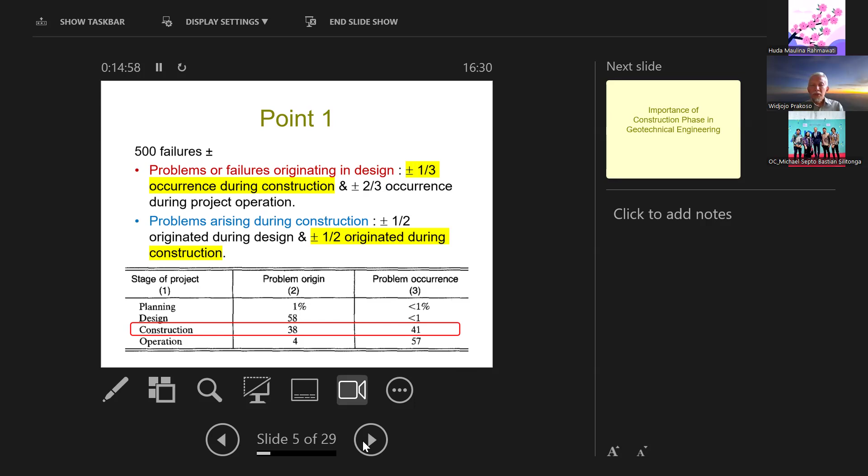Okay, so the following slides are to explain more about this. So the first one is, I'm going to bring up a very early speech of Karl von Terzaghi. I think most of you, or it should be all of you, have heard about Karl Terzaghi. He's called the father of soil mechanics, or the father of geotechnical engineering. He wrote one of the pioneering books in soil mechanics, Soil Mechanics in Engineering Practice.

And his speech was almost 90 years ago, during the International Conference on Soil Mechanics and Foundation Engineering. By the way, that was the first conference. Next year, in 2026, there will be the 21st conference. So 90 years ago, he brought up this issue, and it's still relevant to us even to this day. In his speech, he highlighted some of the very fundamental things about geotechnical engineering.

Okay, there are some points. I have uploaded the paper as well, so you could read the paper from the upload. He highlighted the obvious ones, actually, but this is something that we need to remind ourselves. One of the points he made was soils are made by nature, not by man, and the products of nature are always complex. This is obvious, but sometimes we never think about this.

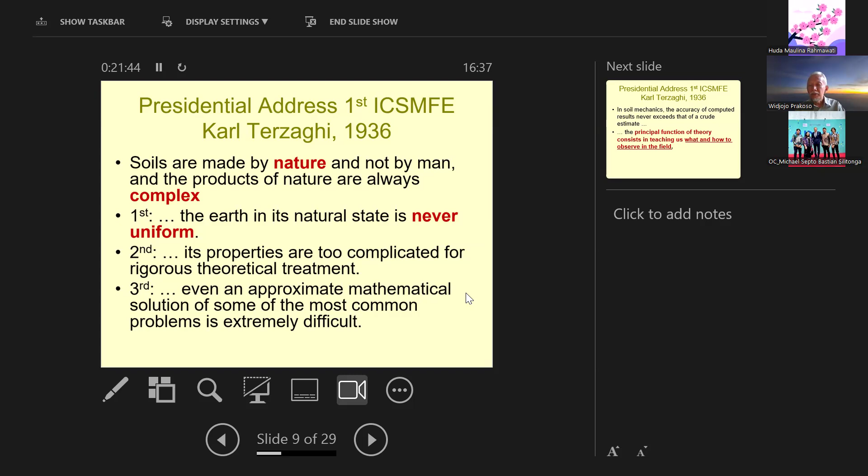These are very classic points by Professor Terzaghi, and this is something that we need to remember. Soils are made by nature, not by man. So soils are complex and never uniform, and whatever numerical methods we have are just approximate, so that we could get some idea of what's going to happen in the field. That's exactly the sentence put in red: the principal function of theory consists in teaching us what and how to observe in the field. So the methods we use are to give ideas, because the actual behavior would be observed in the field.

Okay. So again, what we could observe in the field is during construction. So it is very important to have thorough observations in the field, to make sure that what we expect in our design is observed in the field. If the observation in the field is different from what we expect in the design, we need to change the design, not the other way around.

Okay, because again, the truth is in the field. So if the field behavior is different from what we expect in the design, we need to review, and maybe change the design to match whatever we observe in the field. Okay.

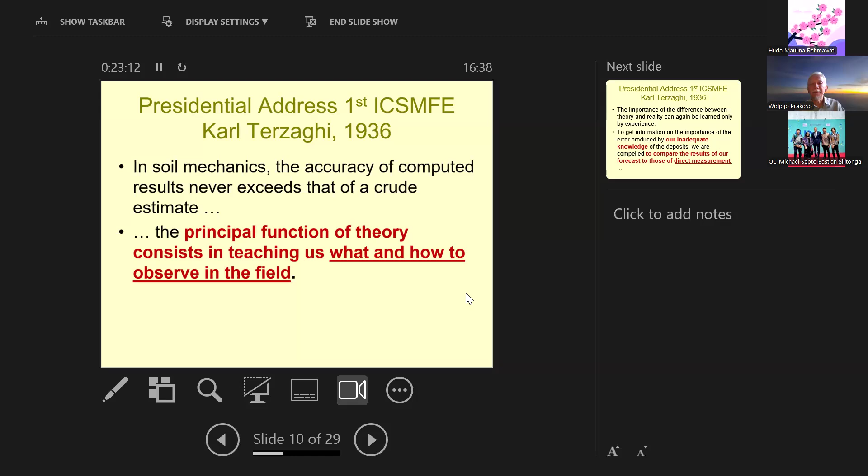And again, there are different sentences just to highlight our inadequate knowledge during the design, and we need to compare the results of our simulations, our numerical analysis, with those of direct measurements from the field. Again, we need to compare the design and the observation in the field. Again, the truth is in the field, not in our numerical model.

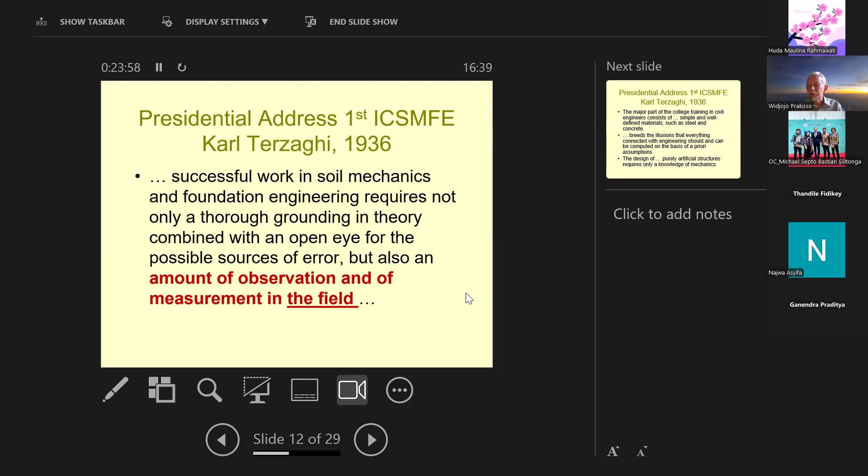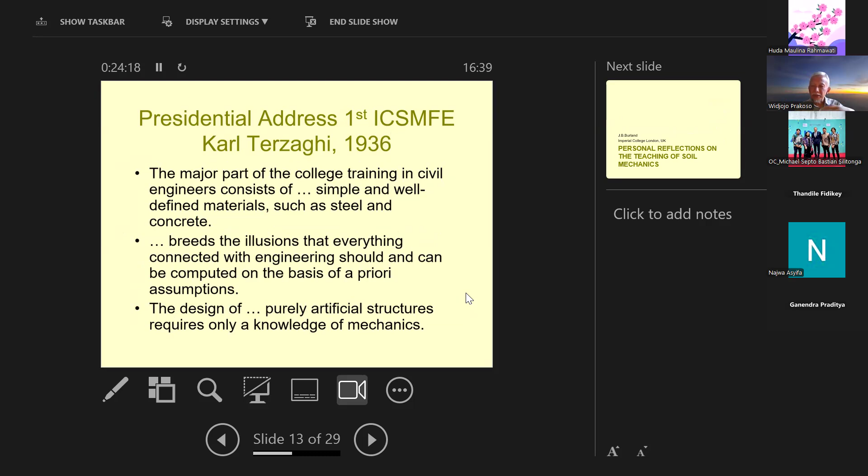And again, just to highlight, what Professor Terzaghi emphasizes is the measurement in the field. Okay. This is just to highlight my statement regarding the steel and the concrete, because those are man-made materials that we could have good quality control. That is not the case when we are dealing with soils.

This is another paper. I already uploaded it in the MAS 2 as well. The paper by Professor John Burland of Imperial College London, a very insightful, very important paper on what he has learned during I think 40, 50 years of practice and teaching in geotechnical engineering. And he developed this so-called geotechnical triangle, and this is to emphasize there are three pillars.

Number one, ground profile. You need to have good soil investigations, and you need to understand the geology. We are in geotechnical engineering. There's a geo part of geotechnical engineering that relates to geology. So you need to understand the geology as well. And after that, we could do lab tests to get the observed behavior of soil, and we need to develop an appropriate model to get some ideas how it's gonna behave in the field.

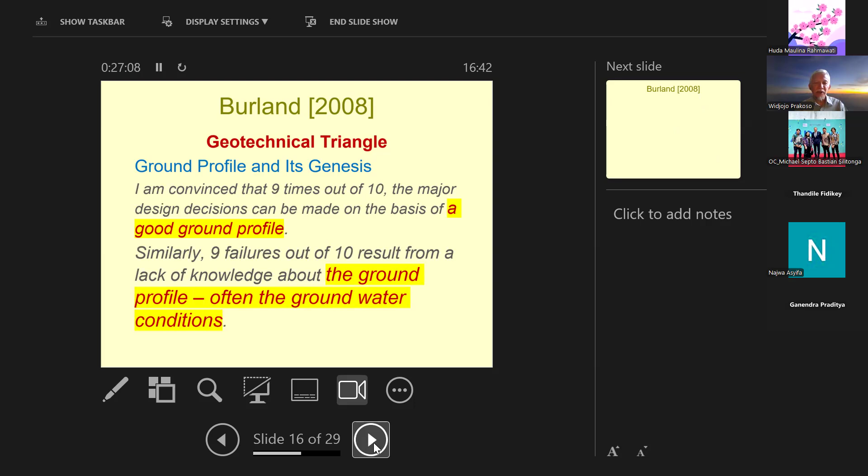Okay, and he mentioned the observed and measured behavior of the soil, the field observations of behavior, including movements and groundwater flow. That is part of one pillar, and rigorous methodologies and advanced instrumentation. We're going to talk about instrumentation as well. So how we can properly observe what we have in the field. Okay? So this is the first part. We need to make sure that we understand the soil behavior, and the soil behavior is really in the field.

Okay, and furthermore, I'm bringing up this paper. It is also in your package in MAS 2. This is another paper by Professor Terzaghi as well, and you could see the title: Consultants, Clients, and Contractors. From the title, you could see contractors, of course, is about the construction phase. So this is really a paper about how the design and the construction should be viewed. Okay. And I have some quotes.

And this is linked to what Professor Osterberg mentioned in his paper, in I think point number 7, communication. Okay. Communication. And this is what has been highlighted actually by Terzaghi. He mentioned, in the realm of earthwork and foundation engineering, the absence of continuous and well-organized contact among the parties is objectionable and even disastrous. So communication is very important, as highlighted by Professor Osterberg as well.

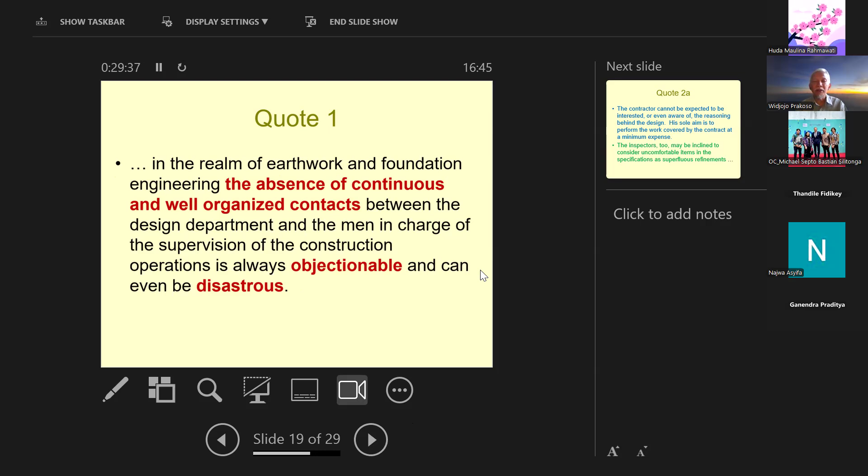And okay, why is it complicated? We need to understand that each party has their own interest. The contractor's objective is most likely how to perform the work as budgeted. Most of the time, the contractors don't really care about the design thinking by the consultants. So can we expect the contractor to have a very rigorous treatment of the theoretical? Unlikely. Okay. How about the inspectors?

Or in our present time, typically called the construction management or the supervisors. Most of them actually just don't have enough knowledge to go into what was highlighted by Professor Osterberg, by Professor Terzaghi. They just do whatever they think is most important, and most likely those things are more on the administrative side of the construction. Not too many inspectors or construction managers really understand the geotechnical conditions.

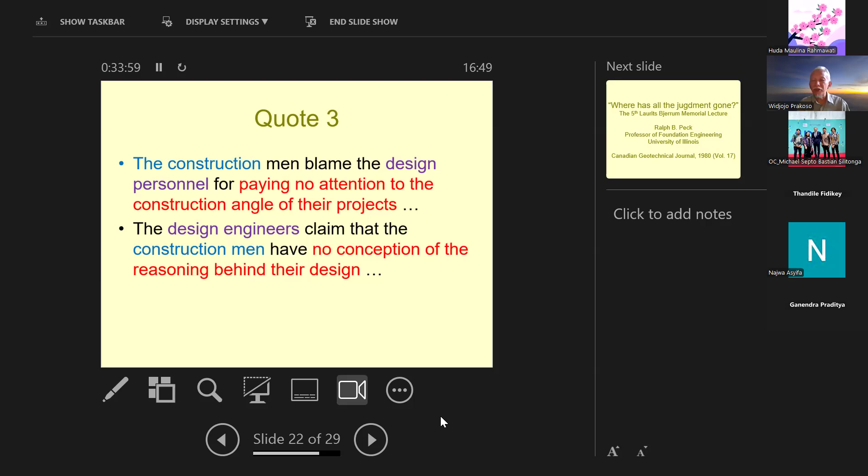And more, there is a paper by Professor Ralph Peck. If you open up the book by Terzaghi, it's typically by Professor Terzaghi and Peck. Professor Peck was Professor Terzaghi's student and his partner for a long time. And he mentioned again the same thing: failures occurred mostly because of lack of communication among parties in design and construction. So this point has been brought up over and over because it still happens to this day.

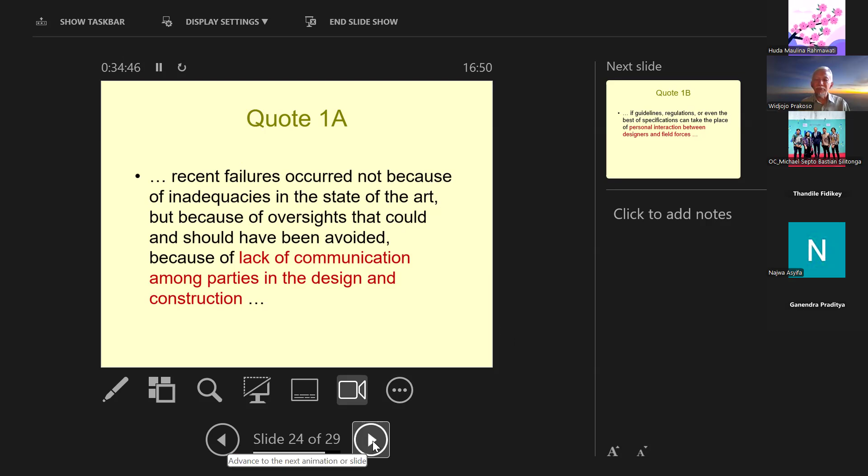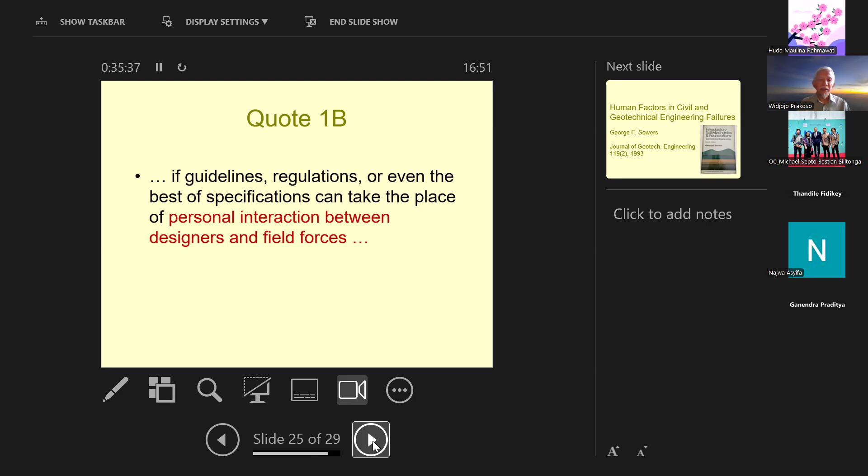Okay, and this is very important. Guidelines, regulations, or even the best specifications cannot take the place of personal interactions between the designers and field forces. So the best documents cannot replace good communications, good interactions. To highlight again, when we do construction, we have to bring the best of our communication skills to the project, so there are no points missed. So I'm going to continue with the paper by Professor Sowers.

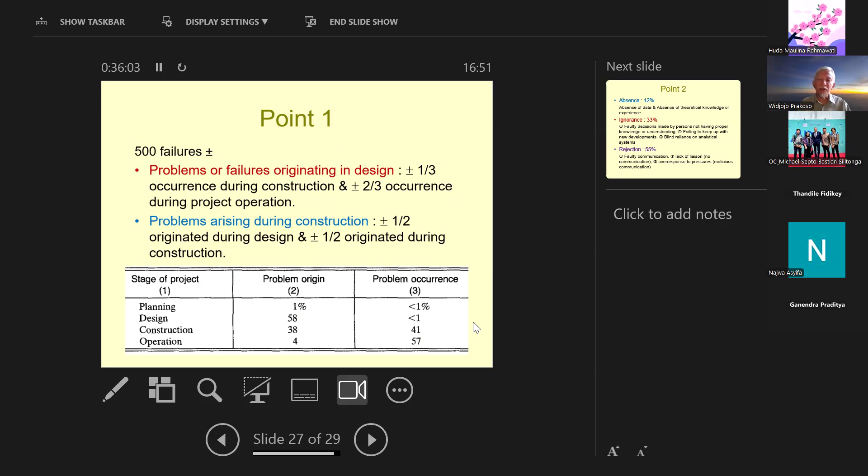The title says Human Factors in Civil and Geotechnical Engineering Failures. This is the slide I showed you previously, to highlight the importance of the construction. Furthermore, he mentioned where or what goes wrong. These statements are quite hard to read, I understand, because when Professor Sowers writes things, it's quite difficult to read. But basically, he proposed there are three major problems that lead to failure.

Number one is absence. Number two is ignorance. Number three, rejection. What is absence? Absence is about the data, the knowledge or experience. And ignorance: faulty decisions made by persons not having proper knowledge or understanding, failing to keep up with new developments, and blind reliance on analytical systems.

As I mentioned to you, whatever software you use, the software is just a tool. The actual behavior is in the field. So if you insist, this is what the numerical simulations tell us, so you think that is the truth? That would lead to so-called ignorance in Professor Sowers' terms. Okay, and the last one is rejection, including communication problems. And if you look at this, the lack of knowledge, the lack of data is just about 12% of the problems leading to failure.

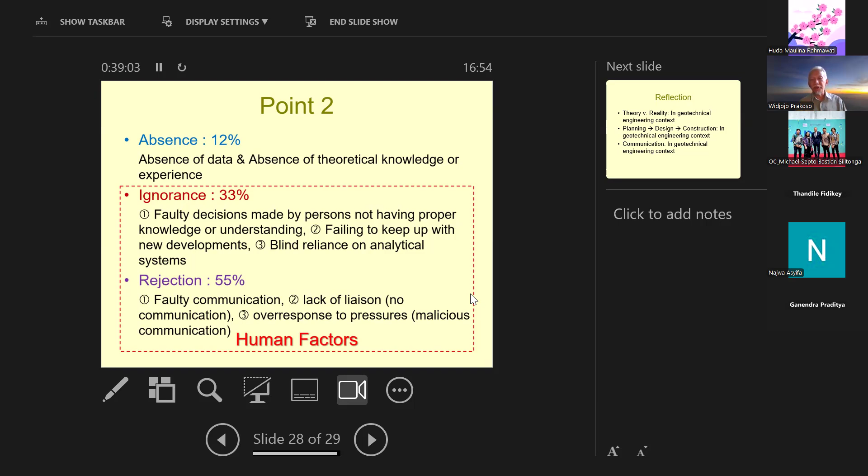Okay, so one thing is that we have to learn about the technical things, about geotechnical engineering, the soil mechanics, the lab, the models, the software. That is important as well. But don't forget about the human factors. That is very important because that would lead to failures in the field.

So just to highlight, when we do reflection, we have to be really careful when we compare the theory and the reality in the geotechnical engineering context. As I mentioned to you, theory is one thing, but the reality is in the field. And again, you have to remember, geotechnical materials, soils, are not man-made materials. We cannot control what is in the field. We have to accept whatever is in the field.

And we have to think through the planning and the design and the construction, to make sure all these phases are interlinked. We cannot just have a planning separated from the design separated from the construction. We cannot have that in geotechnical engineering.

And the last point is about communication. We have to make sure there is good communication among parties, to ensure that the geotechnical engineering work to construct the geostructures is well communicated, and to make sure that everything would go as expected.

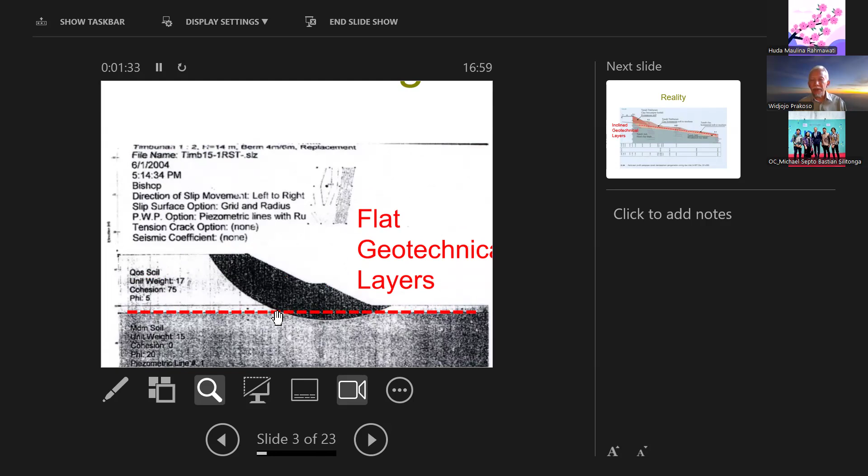This is a typical slope stability analysis. I'm sure you guys are familiar with this. This is the model, and you have the minimum factor of safety, as usual. There is a short-term factor of safety and a long-term factor of safety. Everything looks okay. This is the typical thing we find in a design document. And you have learned to use software like Slope/W, so you could appreciate what I'm talking about.

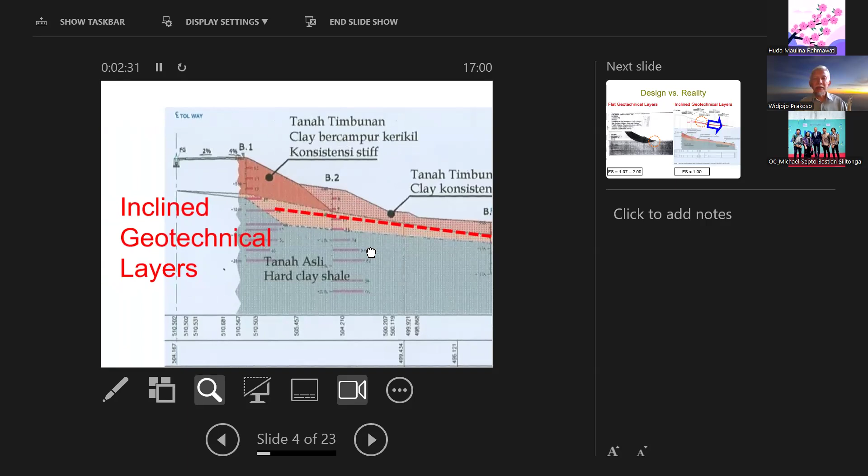And one day there was a failure. The slope failed, and after in-depth investigations, we then understood what happened. The geotechnical layers were not flat, not level. The geotechnical layers were inclined.

So if we compare, the geotechnical design assumed the soil layers were horizontal, flat, level. In reality, the geotechnical layers were inclined. It seems very simple, but in some cases that could lead to failure. So when you do modeling, you have to make sure that you really model what is in the field. You cannot just take whatever model you develop.

No, you have to be very, very careful about the details of the models. Otherwise, your design doesn't represent the reality, and that could lead to failure. You need to be very, very careful when you develop your models. Okay? Whatever model that you use, whether SLOPE/W or the slope stability software or the more advanced software like Plaxis or Midas, finite element models, you need to be careful.

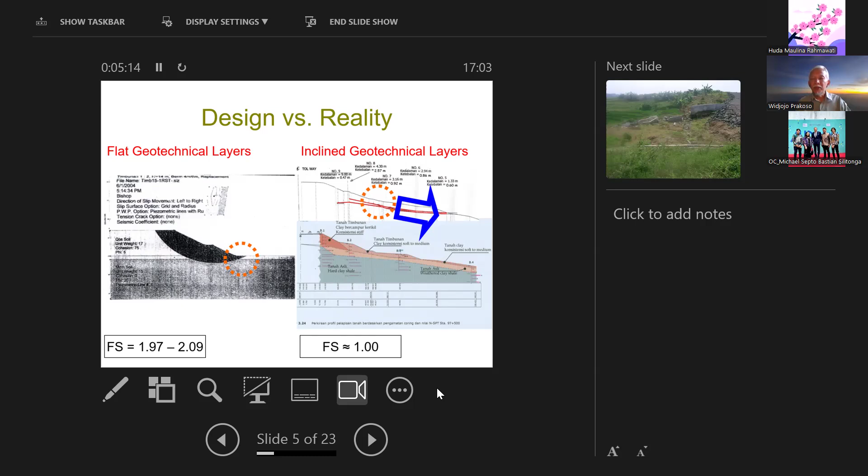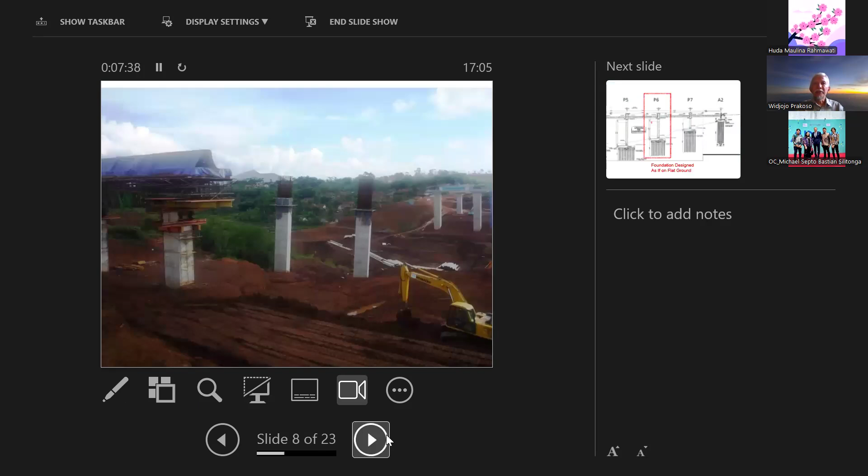Okay, sorry, I'll just give you this example. This happened maybe 10, 15 years ago, during construction of a major highway project. If you look at this, do you notice anything strange in this picture? Just take a look for a second. If you notice something strange about this picture, okay, and if you don't notice, I will just tell you.

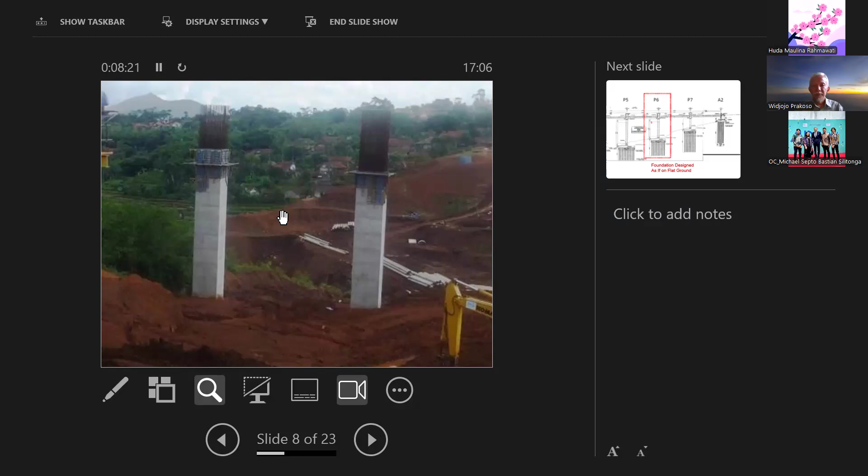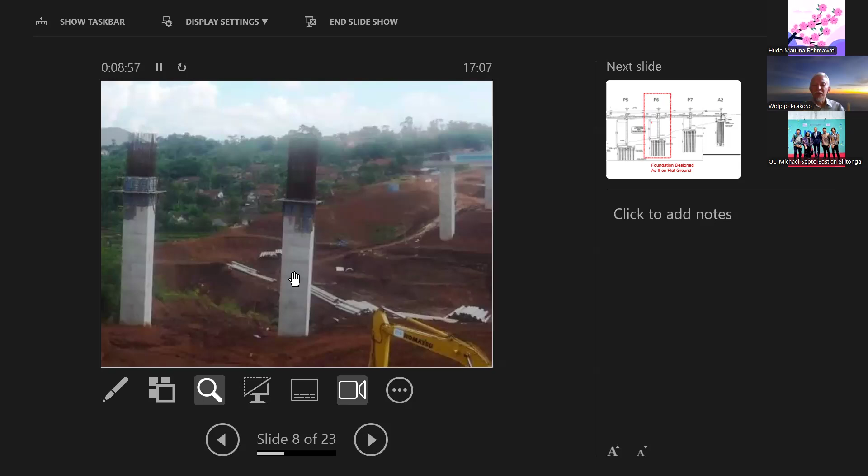If you look at these piers and you compare it to the next one, you could see the pier on the right is at a different angle compared to the pier on the left side. Also, if you compare this pier with the piers far away, you could see these two piers are not at the right angle, or vertical, compared to the other piers. So why are the piers not vertical?

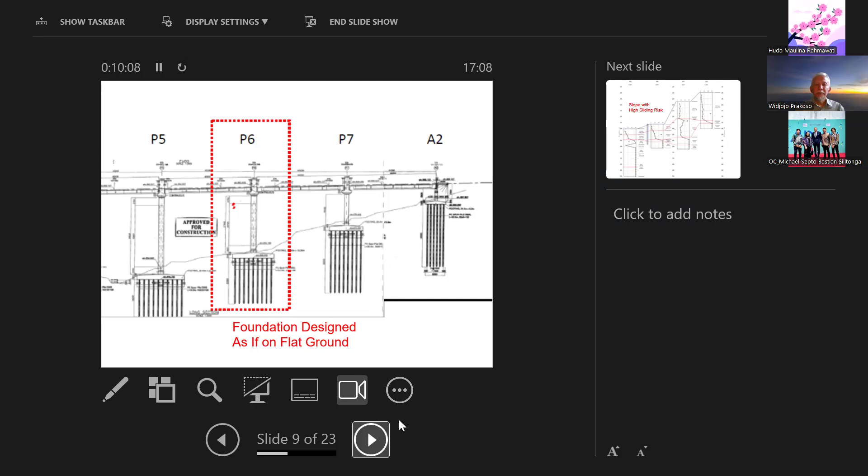During investigations, what we found is that these piers were on slopes, and we found that the foundation of these piers, P6, was designed assuming that the soil was flat. So there is no slope assumed in the design. This is the basic assumption, which is typical for designing bridge piers. But then we need to remember this is a slope, so you cannot design the foundation as if it were on flat ground. You need to consider the slope, especially when there is high sliding risk.

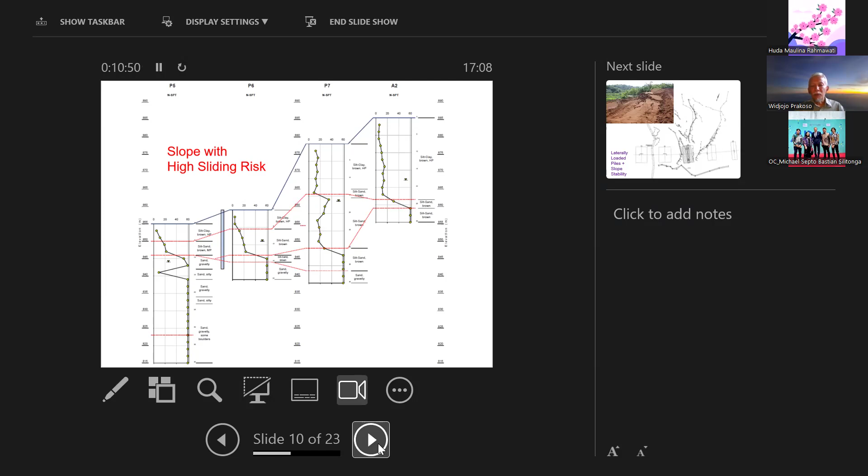You need to combine this modeling. So again, you have to model things in accordance to the reality. You cannot just do whatever you think is the right way in the model but ignore the reality as a whole. In this case, the piers moved because of the slope failing. Why are the piers then not at a vertical angle? Because the foundation has moved.

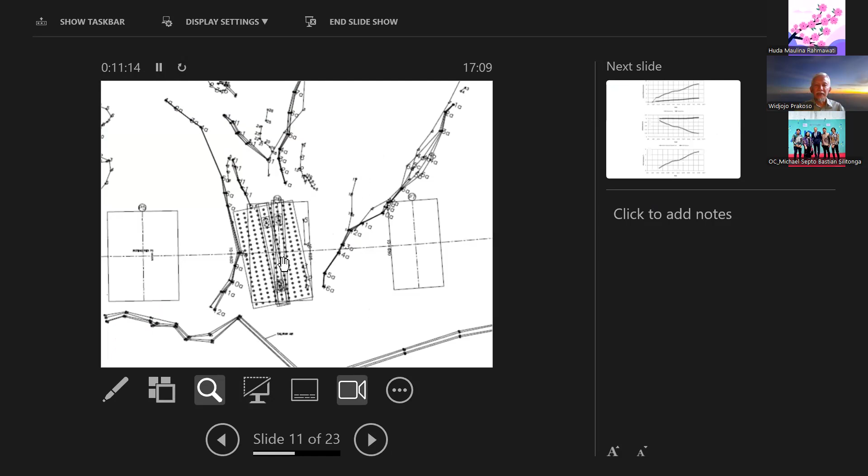If we look at these drawings, there are two for P6. The ones with the foundations are not at the right angle relative to the design position.

And if you look at the more detailed, the foundation moved about 8 meters due to the slope instability, due to the ground movement of the slope. That's why the piers were not vertical, because it moved about 8 meters. So it is very important again to think through the actual ground conditions.

As I mentioned to you, in the first case, the inclination, in the second place, the interaction between the slope and the foundations. You have to think through when you are dealing with geostructures: what are the actual conditions? Do I model these actual conditions properly? Do I have to change the models so that the models are representing the actual conditions? These are questions that you need to ask yourself.

Again, because soils are natural material, you cannot expect the soils to follow your assumption. It will not happen. So the soils have to be modeled as they are found in the field. So these two examples highlighted what has been highlighted before.

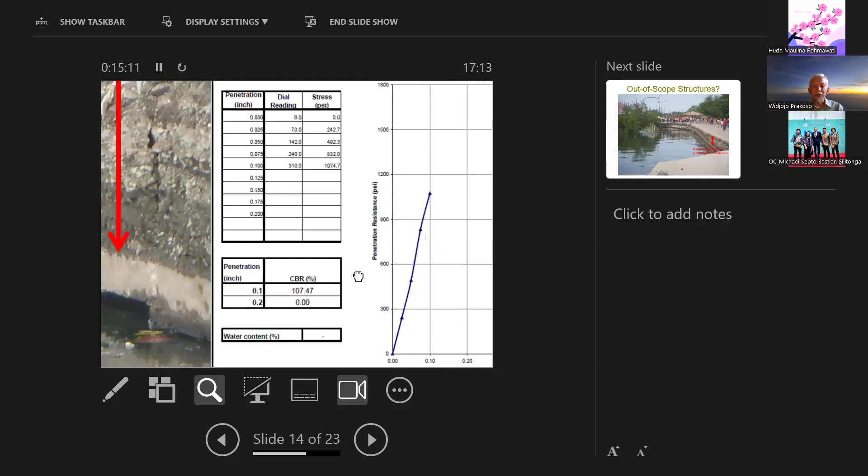This is an example, actually a very simple project. This project is about road rehabilitation. It should not be a very difficult project. Basically, to rehabilitate the road, you need to add some fill materials. The contractor did it already, and they actually did a very good job. And they contacted us, the soil mechanics laboratory in Depok. I signed the report actually, and we tested the additional fill materials, and they passed. The contractor did a good job based on the scope of work in the contract.

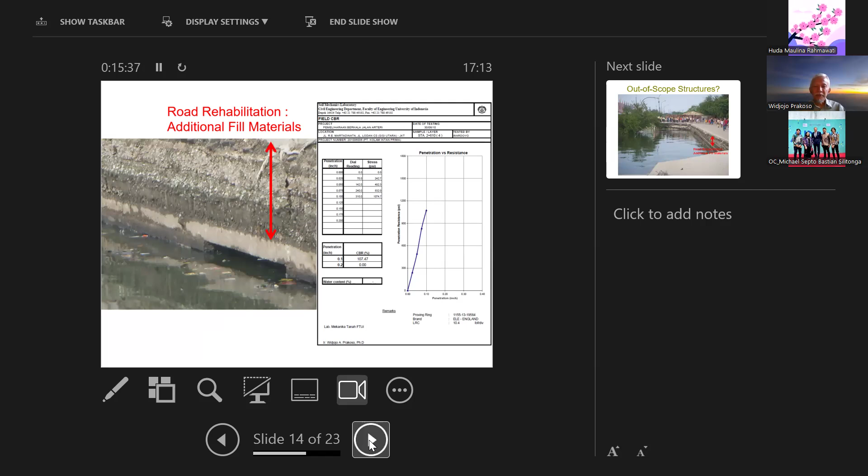And one day, the road collapsed. The scope of work of the project is just road rehabilitation. The contractor just needed to put additional fill materials and the new rigid pavement, things like that. But one day, the road collapsed. Why did the road collapse? The investigations revealed that there was a wall and fill collapse beneath the additional fill.

So did the contractor do something wrong? The contractor just did whatever they were supposed to do. They just followed the contract, added fill materials, and did the rigid pavement after that. They did it according to the contract. So the people who wrote the contract didn't realize there was a wall and soft soil beneath the road. And the factor of safety of the original condition was quite low. So because the contractor added some fill materials, the whole thing just collapsed.

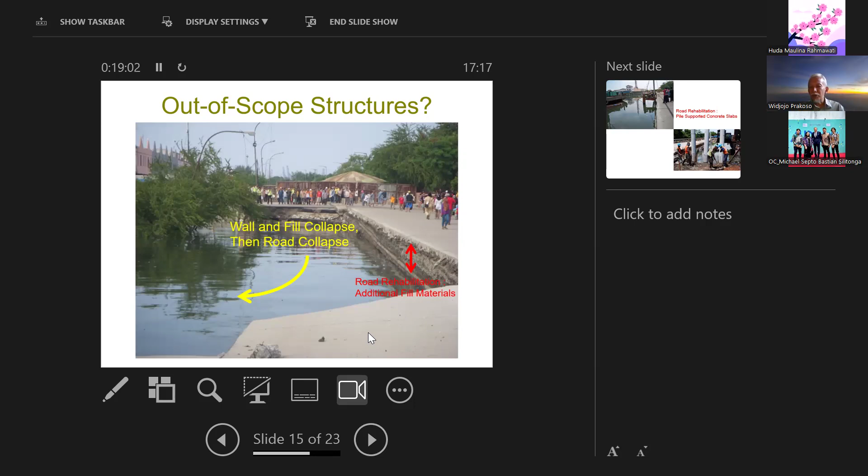It's a very important road connecting the busy business district to Tanjung Priok Port, the Port of Tanjung Priok. At the end, they had to rebuild the street, of course, and they had to use driven piles and pile-supported concrete slabs, and the project changed completely from a very simple road rehabilitation to a major crisis and to the rebuild of the road using much more expensive design choices.

Okay, so again, you need to be very careful about what you are dealing with. You need to think about your surroundings. You need to think about what exists in the surrounding areas. Okay. Again, this is to give ideas that you need to think. You have to think through what's around your project when you're dealing with geotechnical engineering structures.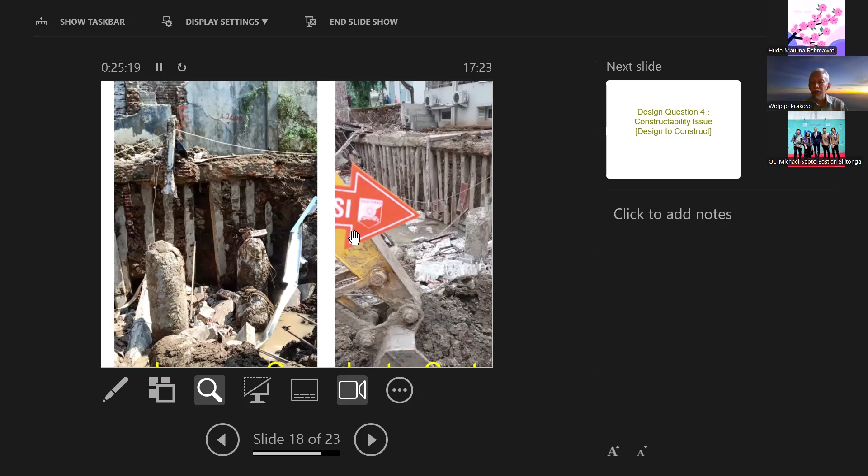So we actually investigated further. Did you get a permit for this construction? Yes, the contractor mentioned, we got the permit from the city. Oh, okay. Who signed the permit? We went through all the administrative documents, and the permit was fine. So the contractor got the permit. The contractor had the initiative to add soldier piles to stabilize the basement excavation, but still it collapsed, because of the improper groundwater control, and ultimately four people died.

So how can I put it? What went wrong here? The design was not complete. The authority gave the permit. The contractor didn't really observe what happened to the neighbors. So everything that could go wrong went wrong at this project. And that's really a problem. And again, as I mentioned, four people died in this project. So sorry.

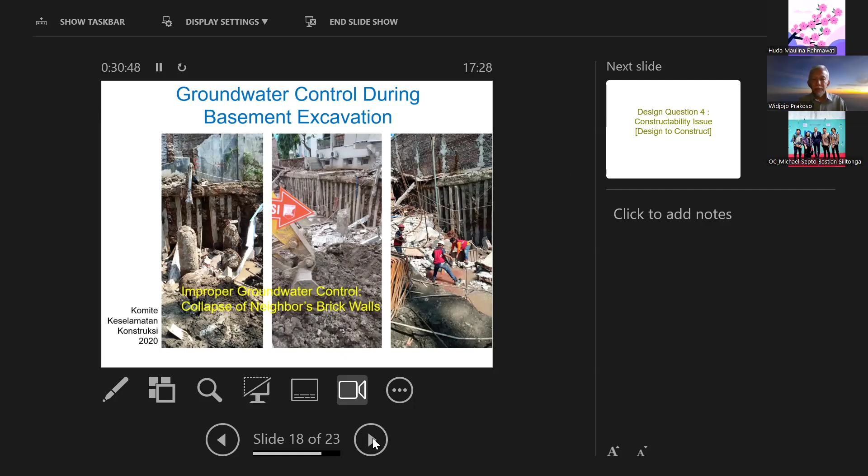Okay, and this is the last design example that I will give you. The constructability issue. When you are, let's say, in the consultant position, you need to ask yourself whether this could be constructed. That's what constructability is all about, whether your design could be constructed. I'll just give you an example. This case was in Jakarta as well.

If you are a train user, you probably know Stasiun Jakarta Kota. This is just in front of Stasiun Jakarta Kota. The soil was very soft clay in the upper layer, typical in the northern part of Jakarta. The project was almost 20 years ago. If you go to Stasiun Jakarta Kota and walk across the station, you could see an underground place. This is about that.

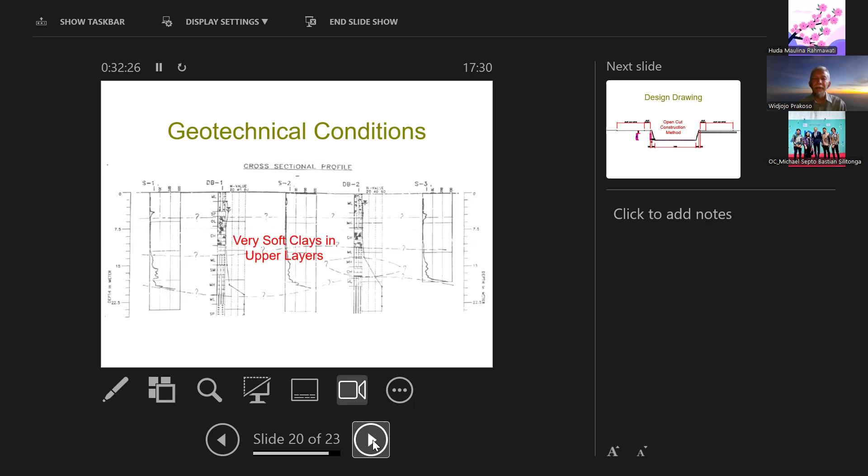So the soil was very soft, and the design consultant just came up with this: we need to make an underground space below the current surface level, and just do the open cut construction method. That is actually what's in the design. And the contractor bid based on that, signed the contract based on a very simple open cut construction method. The contractor just didn't think about the difficulties that they would face after that.

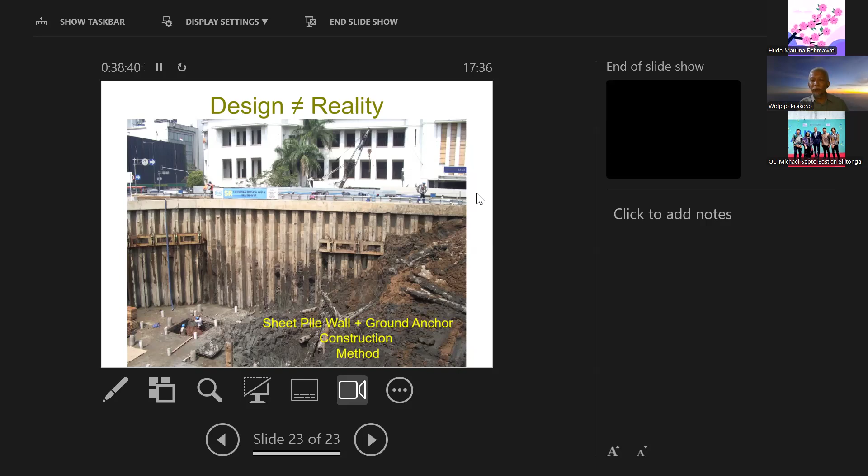Okay, so these four or five examples give you real world problems that I experienced first-hand, so I could give you the details. And for the last example, again, this was a project by the government of Jakarta, meaning the authorities gave the contractor permission to do the construction, but the authorities just didn't have enough capacity to understand the implications of this design by the consultant.

So hopefully, wherever you work in the future, whether in the government, a contractor, a consultant, or in construction management, you need to think very thoroughly about your neighbors, about the actual ground conditions, whether the construction could proceed as designed, or you have to change the design. And as highlighted in previous discussion, you need to make sure that communications among parties are well established so the construction would be performed effectively and safely.

So this is the narrative that I need to convey to you, why we propose this course, geotechnical construction methods, not only to learn about different construction methods, but to highlight the importance of the construction phase in the project life cycle. And as you submitted, you have touched upon case studies, forensic studies, to give you ideas. If you don't do construction projects carefully, that could lead to problems on the construction site.